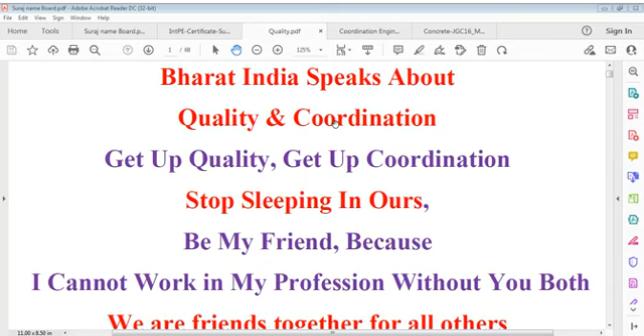We have coordination in engineering projects, and we have quality in our country that speaks about quality and coordination. I say get up on quality and get up on coordination, I ask myself, we ask ourselves to get up. In relation to quality requirements and coordination work, we should not sleep on this. We should be alert all the time that we are missing something, and everybody, at least civil engineering professionals, must say I cannot work in my profession without quality, without coordination. I am saying this because civil engineering is the only branch where individual contribution matters a lot, to a maximum extent. In other branches like mechanical engineering, electrical engineering, and many other engineerings, personal involvement does not amount to that level as it does in civil engineering.

On-site work, personal enjoyment of work, personal contribution of work, personal lead of work, personal planning and determination, and many other factors count in construction and design. Only civil engineering gives you flexibility of decision and flexibility in the availability of information to select, and that's a very important point. That's why I'm not talking about the money value one gets, but the satisfaction one can get, and how much I or you can contribute to the development of this earth. This means if you do it honestly, sincerely, and with whatever is expected of an engineer, not only on earth but from God's perspective too. I think it's the only branch that can be valued so much.

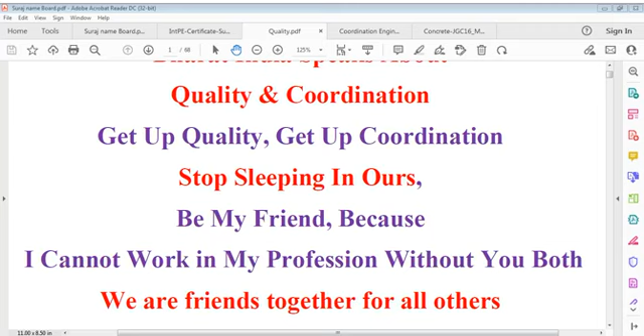That's why I always select this issue of quality and coordination every day, because it never ends. And what I think at that time I speak, just like the title says: quality, coordination, engineering project works, and reliable engineers. This is one part of this talk.

Then there is the communication part, and we have contracts and concrete, and of course construction methods. I'm talking of construction methods. There may be issue of design, I mean to say production methods, there may be processing methods. It's just indicative, that something is there which we have to control.

And engineers are that element of society without which we cannot develop, we cannot move forward. And engineers know this. I don't say that they are very educated people, they have complete potential, full potential of doing what they desire. But they should be supported by certain system, and systems do exist, but not functional as it should be intended. I'm simply saying engineer is role model of society.

Is it? Question is that. Today who wants to be an engineer? Very few people, because they think money criteria is first consideration. How much money shall one get if you become an engineer? And first of all, you need money to become an engineer, same way as you need money for becoming a doctor. So when the point of view of money comes in, then you cannot think of quality alone or coordination alone.

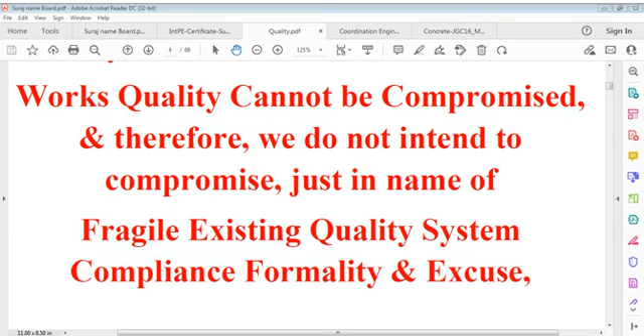That is your own choice, and it's not just you alone. If you are alone, then whatever you do, it's your input only that amounts and calculates and operates. You can say, okay fine, you infill your efficiency and your knowledge into that, and the result would be qualitative.

But if the same work is done by many people, and that is a requirement because one person is not enough to do the job, then you have to think of the quality percentage everybody can contribute. That's the point where we say individuals as individuals do better than when a group does. But group is important, because every work cannot be done by an individual, particularly in construction and development. Individuals can contribute, but every individual is not equal, and that we have to keep in mind.

Therefore, if we train, we have to train everybody in that function, that you have to do this much at least. If you cannot do more than this, at least this much you have to do, and everybody has to do this, so that we try to bring uniformity in the performance coefficient level. That's what you see.

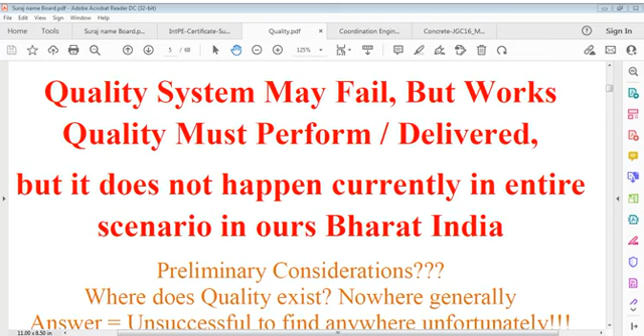So now, about the quality system I'm talking about, there are really so many obstructions in that, so many.

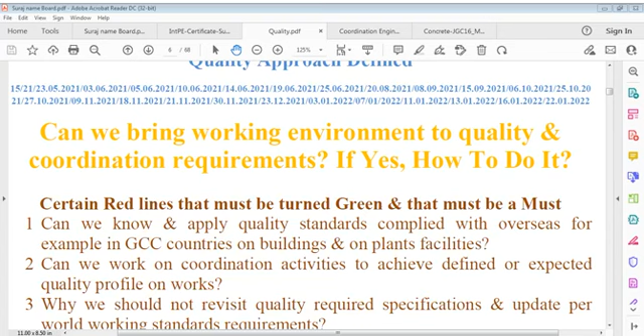That's what we have to do. Those persons who don't have information must be provided information. Information must be brought to those persons who require it, and it must be provided at the right time, when it is required. That's called right time, not that you provide it whenever you wish.

If you don't provide it at the right time, it has no meaning. That's an important point we say: it must be provided at the right time.

Now the signal has dropped, I think it will stop again. It's come back. Information must be brought to the personnel who require it, and it must be provided at the right time, for the right requirement, and quite rightly, duly coordinated.

Dissemination of engineering information about quality requirements and how to transform using method statements. Dissemination means spreading your information to those who require it. It's a kind of seminar, either a direct seminar or a remote seminar, providing certain information, and that is called dissemination of engineering information about quality requirements.

And it's not only engineering work this applies to. This principle can be applied and extended to whatever field you wish. How to concentrate on construction methods, decision making, that's another point.

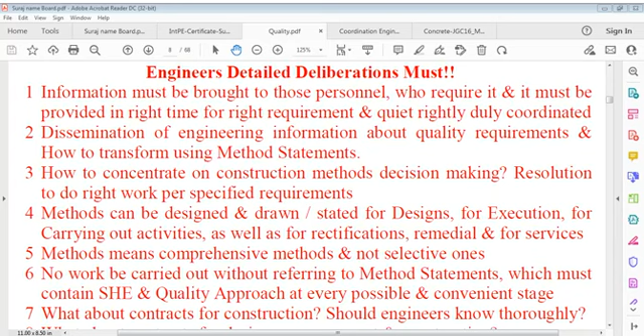Methods means comprehensive methods, not selective ones. Everywhere there should be a method for every activity. Sometimes we think, oh, this is a very small activity, why should you worry about this, we just do as we know.

No, you cannot do that. This means carelessness. You enter into a degree of carelessness, a degree of ignorance. Ignorance is not acceptable, because you have to keep people on track. You cannot say this is a very small distance, a train can go without a track. You cannot say that a train needs no track.

I'm just giving an example. If there's a gap somewhere, the train cannot go. You can't say, no, take it, no problem.

It will move, and this is carelessness. With this, you can say it's the wrong way. Methods means comprehensive methods and not selective ones.

No work can be carried out without referring to method statements, which must contain safety, health and environment issues, and quality approach at every possible and convenient stage. Otherwise, it is not the right way to do the job, because safety where people work is very important. At least where people work, personal work. Of course machines also require it, but I am talking of lives first.

Safety, health and environment is a very important subject for every worker, for every organizer to attend to. And of course quality approach is in parallel to that, but if you are safe, you can work qualitatively.

What about contracts for construction? Contracts is a very important part in construction. I'm sure many people skip this topic of contracts because they're not interested. People say, I am a designer, what do I have to do? I am a writer, what do I have to do with contract? I am this and I am that. People do not understand contract.

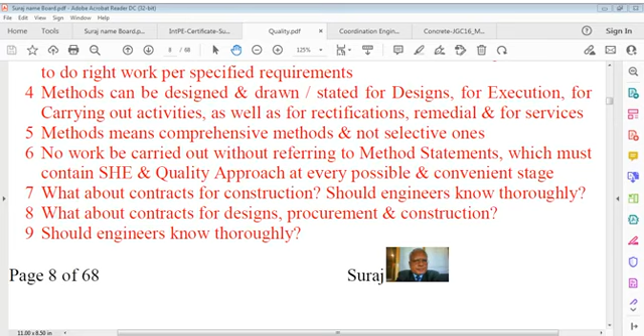Quality contract - that's a very important point. When I say quality contract, the contract is also of certain quality. One thing is that I just take some contract from the past and copy and paste it - that doesn't mean a quality contract. That means copying and pasting without even checking whether the clauses in that contract relate to the work you're doing now, or whether you just have a habit of copying and pasting and saying I have done it.

That point means analysis. You have to think, not just do analysis, but think about how this work starts, how it moves, and how it ends, and what clauses are required and what clauses are not required. You have to think of a standard contract simultaneously, think about replacing many clauses, or generate your own contract without referring to any standard contract.

That depends on your efficiency and specialization, and how it can impact others, because you have mutual responsibility of both parties to each other on the contract - you are responsible, both party 1 and party 2. It is the combination and contribution of responsibilities by both parties that leads to success of a project, or to failure - meaning you cannot fulfill your responsibility, or disputes are generated, whatever you can say.

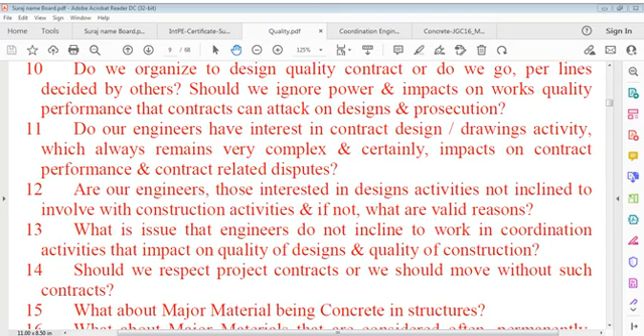How can you move? Can you move successfully without contact with others? If you can move successfully, this means you yourself have indirectly become a contractor. You are a contractor without getting any package, just your salary. That's what I say. So, should we respect project contracts, or should we move without such contracts?

Concrete is a major material in construction, at least in development. Concrete is a part of development, concrete is life. As far as our world is concerned, concrete is used everywhere. It's an international material, you can say, just like bricks were.

So what is the issue? What about engineering materials being used, and what about concrete we have to think of, and what about major materials that are considered permanently included in structures and buildings, even everywhere on all projects. It's a very important point we're discussing here. First of all, we have to use major materials, and concrete is a major material in construction.

There are many other major materials which are used for permanent inclusion. And when I say permanent inclusion, this means it's the main material for which you have to claim payment for, original payment, not transferred payment. When somebody gives you this, it means you have to work on that material, and you have to buy that material before working.

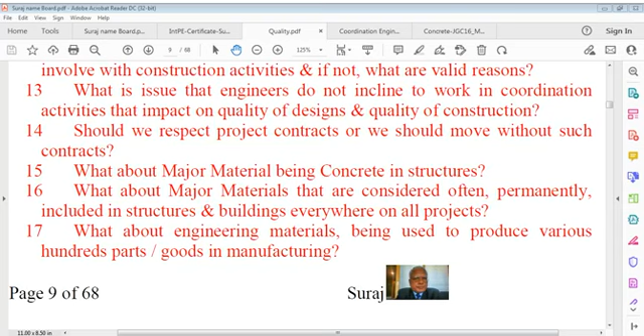Now, what about engineering materials we have to think of being used to produce various parts and goods in manufacturing? This is what is provided by government to force productions and construction to be delivered with quality compliance. In fact, there can be no force.

It's only for you to decide. It's for the employer to decide. It is for the contractor to deliver, and it's for the engineer to ensure that quality is delivered. And it's also for a third party nowadays to ensure more and more how best we can get it. Otherwise, it's always a problem. It's a very important part here, we have to understand very clearly.

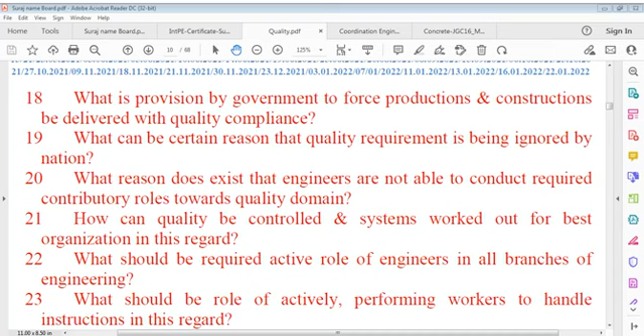It's a very important part, I can say very important part, but understand it very clearly. Otherwise, we face problems and problems and problems. Concrete is a very important material. I now take something on quality, on coordination.

Say here that is coordination. First of all, missing coordination means missing good engineering, and that is the first objection here. We cannot coordinate if we don't have information, and also if we do not coordinate, which means we miss good engineering.

It's up to you whether you want good engineering or you don't want good engineering. It's in the hands of the owner, or in the hands of the engineer, and also in the hands of the contractor, because these contractors I do not consider very ordinary contractors who take the project. They are professionals.

Legally required professionals, not simply professionals. It's in your hands what level of person you want to call a contractor. Everybody can claim I am a contractor, I am a builder. Everybody can claim that. But for me, those who are professionals, who have long experience in doing good work, not just experience, I can call them contractors. Others are just nothing. Contractor means contractor, honor means honor. We have to decide what is right.

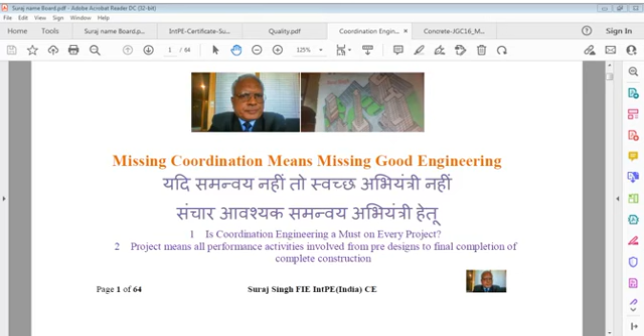Coordination means missing good engineering if we miss coordination, and some small questions may arise there: is coordination in engineering a must on every project? That is a question everybody has to think on. And project means all performance activities involved from pre-designs to final completion of complete construction, and also a few difficult questions to be answered by the engineering community, which may be about quality and coordination and about respective involvement in entirety.

Can we ignore these domains? And if we can, which other way can we get into that point? We have to decide. If we miss these domains, if we ignore the quality requirement, and if we ignore coordination, then how can we work? Can we even work? That could be a question. If not, what is the other way, how to do it? All these questions should come to the mind of everybody.

And what are the respective involvements in entirety? We have to decide how to do that, which is the other way. Can we ignore these domains? And if we can ignore them, then we must have something else with us, some other domain which we do not know, because even quality and coordination we do not fully know, in fact.

So we are calling them domains. These two do not exist for people. What do we engineers think over issues as mentioned? What's personal opinion? What is intellectual opinion? And what is professional opinion? That we have to think of.

We have to think. How many of us do conduct work per quality and coordination engineering requirement? How we have to think ourselves. We have to question. As an individual, I can question. I can think of myself.

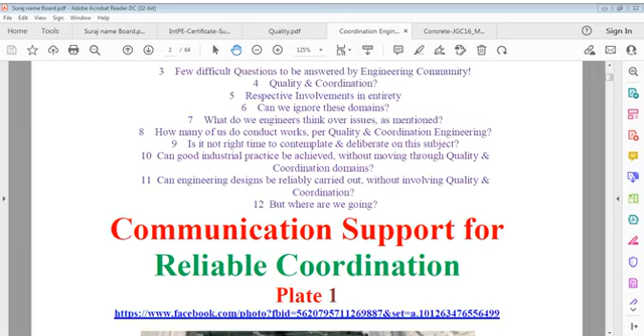And communication support for reliable coordination. When I say reliable coordination, this is also very important, just like I said, reliable engineers. Reliable engineers can do reliable coordination, otherwise it cannot be done. Coordination is not easy. It's not communication alone, and communication support it is.

When we say communication support for reliable coordination, there should be consideration of what source of information is required, how it can be communicated. My time has gone waste - we should not say that.

That's one point, a very important point, when we say communication support for reliable coordination, and that point we have to realize as a fact in life. In fact, we can talk a lot on this subject, thinking and thinking and thinking, and thinking has got no limits. And that's also a fact of life - thinking has got no limits.

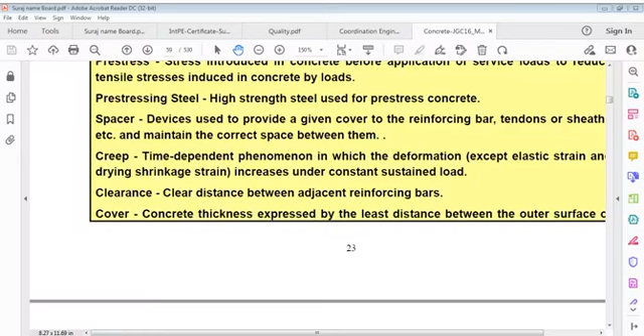I think it's page 50, it was there somewhere. Page 50: creep, clearances, cover, mix proportion, trial mixing, characteristic compressive strength of concrete.

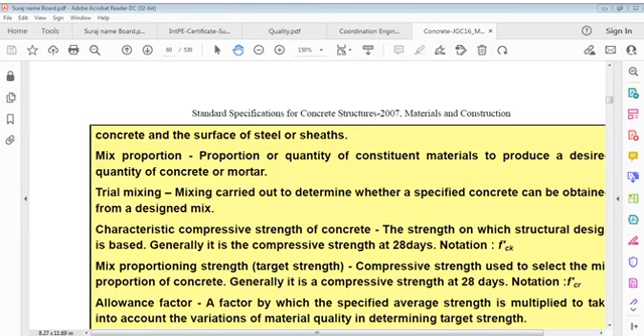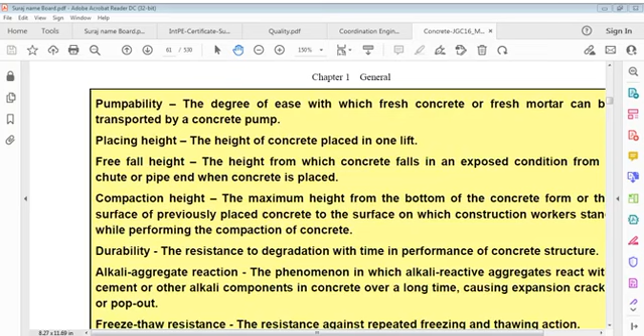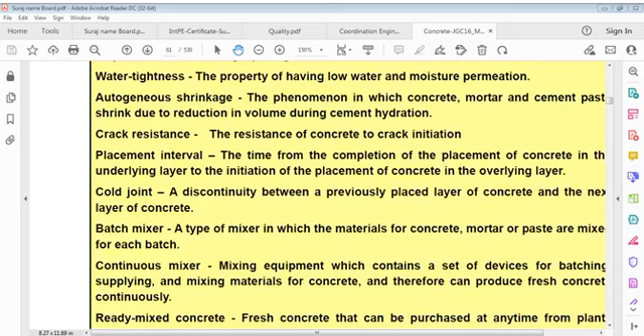Pumpability, placing height, free fall height, shoot fall height - I'm sorry, free fall height, compaction height, durability, alkali, water tightness, autogenous shrinkage, crack resistance, placement interval, cold joint, batch mixer, continuous mixer, ready mix concrete, shearing, sheathing, wooden sheathing.

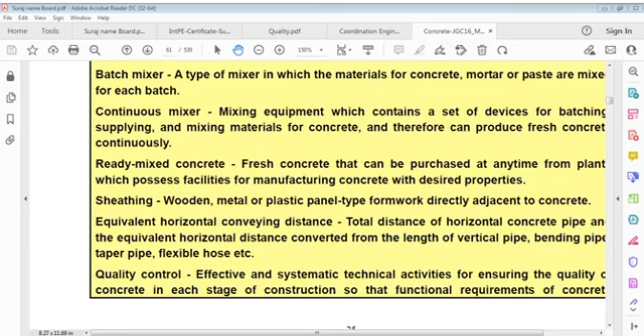Equivalent horizontal conveying distance, quality control, inspection, control chart, mass concrete, plasticized concrete, standard curing, moist curing, temperature.

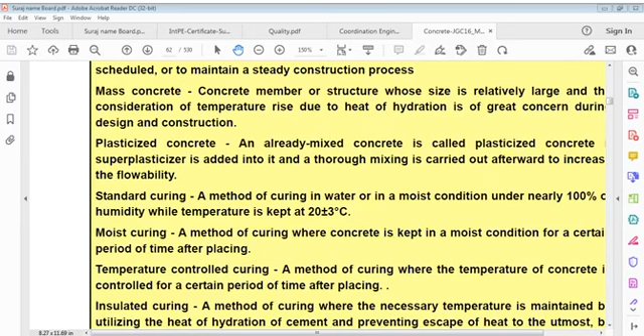We could not explain last time due to shortage of time, and now it's around 1 hour we have gone through into this talk. Maybe I don't know how many more, maybe 1 hour more.

Reinforced concrete - we are discussing the concrete chapter, concrete specification, which I consider very... well, we all know. And we also know that without concrete, there's no way - currently everywhere concrete is included. It's used for short term works and for long term works. We say reinforced concrete, and as you can see, these comments are certain, and you can also think of it. It's not necessary that these comments cannot be further explained and can be thought of.

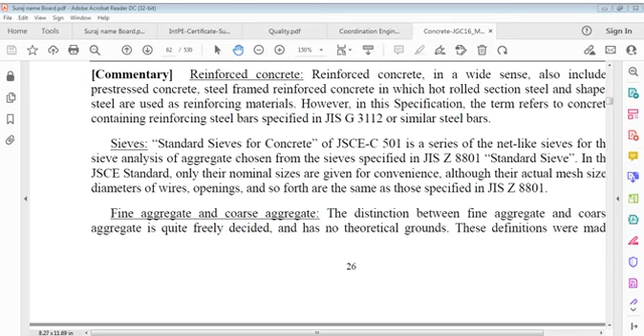Reinforced concrete, in a wide sense, also includes pre-stressed concrete and steel framed reinforced concrete, in which hot rolled section steel and shaped steel are used as reinforcing materials.

However, in this specification, the term refers to concrete containing reinforcing steel bars.

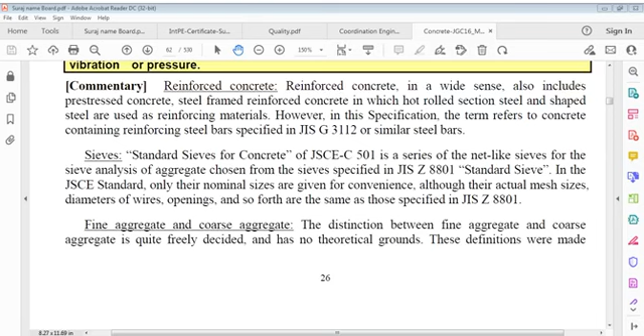What are sieves actually? Standard sieves for concrete are a series of net-like sieves, chosen from sieves specified in this code for sieve analysis of aggregate. In the JSCE standard or in this institutional standard, only nominal sizes are given for convenience, although actual mesh sizes, wire diameters, and openings are the same.

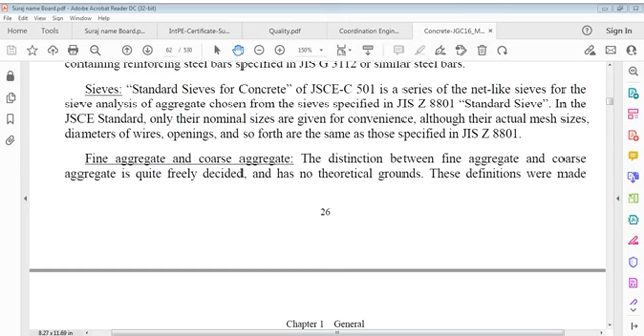This clause is considering customary practice. Aggregate prepared on construction site is not screened thoroughly, so aggregate particles passing a 5 mm sieve are frequently included in coarse aggregate, and particles retained on a 5 mm sieve are included in fine aggregate.

It says that aggregate prepared on construction site is not screened thoroughly. Aggregate particles passing a 5 mm sieve are frequently included in coarse aggregate, and particles retained on a 5 mm sieve in fine aggregate.

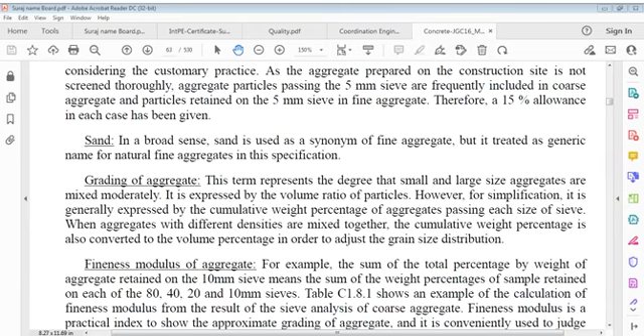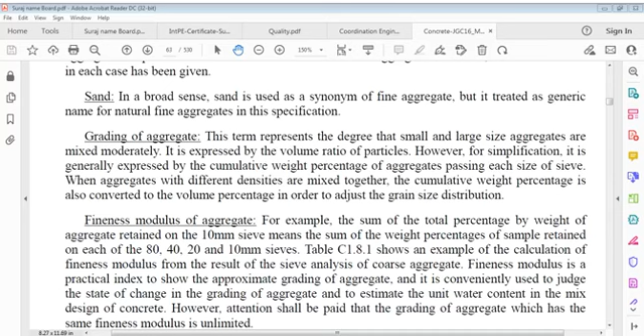This term, grading of aggregate, represents the degree that small and large size aggregates are mixed moderately. It is expressed by volume ratio of particles; however, for simplification, it is generally expressed by cumulative weight percentage of aggregate passing each size of sieve.

When aggregates with different densities are mixed together, cumulative weight percentage is also converted to volume percentage in order to adjust grain size distribution.

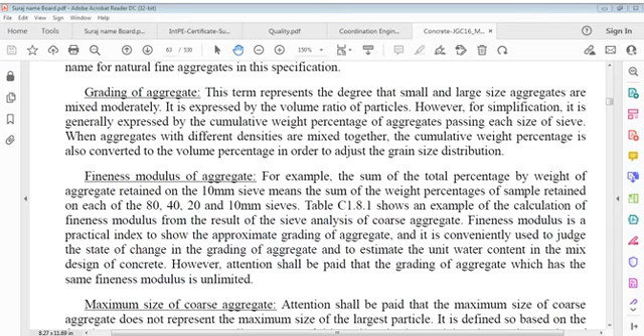Retained on 10 mm sieve means the sum of weight percentages of sample retained on each of the 80, 40, 20 and 10 mm sieves. Let's go to the table.

This shows an example of calculation of fineness modulus from the results of sieve analysis of coarse aggregate. Fineness modulus is a practical index to show approximate grading of aggregate, and is conveniently used to judge the state of change in grading of aggregate and to estimate unit water content in mix design of concrete. However, attention shall be paid that grading of aggregate which has the same fineness modulus...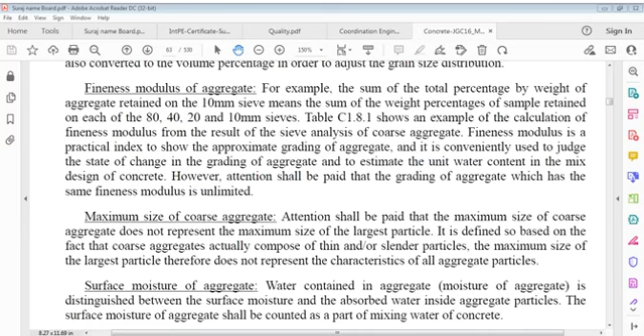I'm sorry, not 81, I think I was wrong somewhere. Well, no problem, let's see this table. This is an example of calculation of fineness modulus for fine aggregate and coarse aggregate.

It's very simple: quantity of sample retained on the 80 mm sieve, 40 mm, 20, 10, 5, 2.5, 1.2 mm, 600 micrometer, 300 micrometer and 150 micrometer. So 80, 40, 20, 10, 5, 2.5, 1.2, 0.6, 0.3, or you can say 0.15 - rather than writing it that way, it means 0.15 millimeter.

Again, 80 mm - do you know what that is? More than 3 inches. 80, 40 is about 1.5 inches, 20 is 3/4 inch, 10 is approximately half inch, and so on. So remember that sieve sizes in millimeter terms mean a square mesh of that size: 80, 40, 20 - it goes in half and half, starting with 80, then half to 40, then 20, then 10, then 5, then 2.5, and likewise down to 0.15. So the sequence is 80, 40, 20, 10, 5, 2.5, 1.2, 0.6, 0.3 and 0.15.

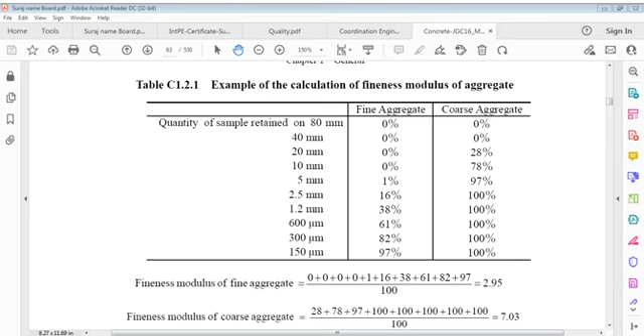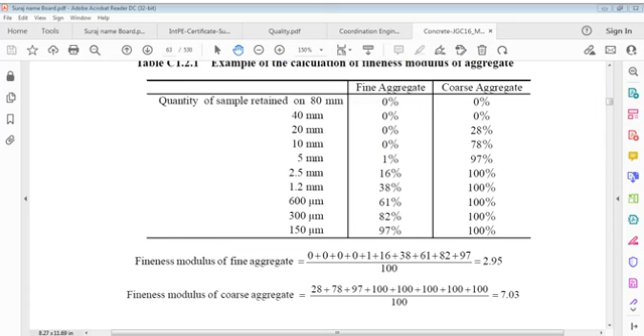Likewise, we can see this for both coarse aggregate and fine aggregate. For coarse aggregate, the term is 20 mm where we can retain something, and if you sum up this given example, the fineness modulus of fine aggregate is the sum here, divided by 100, giving us 2.95, and for coarse aggregate...